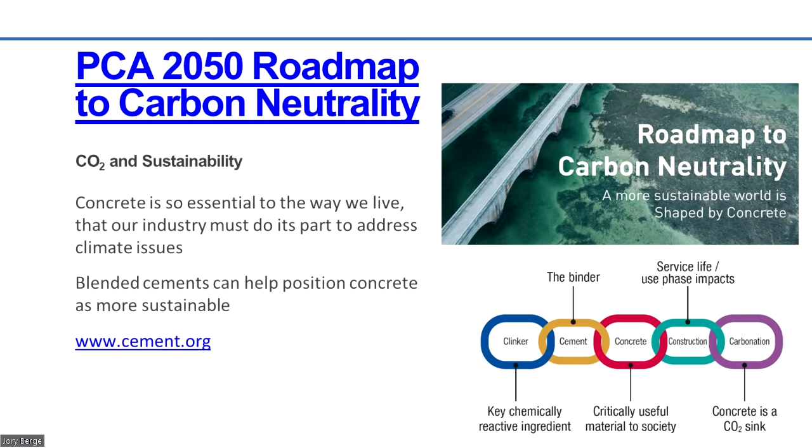The reason we're doing this is not to surprise anyone, but for sustainability. Just last year, PCA and its members put out a roadmap to carbon neutrality. The goal is to be carbon neutral by 2050, and the ways to get there include blended cements. There are many other things that need to be optimized in a concrete mixture and in concrete use and construction, but the choices we make with the blends of cement will improve its sustainability footprint.

So what is a Portland limestone cement? It's exactly what it sounds like. If you know what Portland cement is, its main characteristics are the clinker that is ground to a fine blend and interblended with gypsum or calcium sulfate to control the heat of hydration. That's your everyday good old fashioned Portland cement since the early 1900s, late 1800s.

However, since the 70s and 80s in Europe, people have been blending other products, and many types of products are called supplementary cementing materials that you hear about today. But we've also been intergrinding limestone as an addition to the cement. What's important here is thinking about it as an optimized material at a cement plant. So instead of this being added subjectively at a ready mix plant, this is added by the cement producers and measured and performance tested before it goes out to market.

Currently this is probably going to save you about 10% on your CO2 footprint. The other takeaway with the US standards is that there are C1157 cements that are performance-based, that basically tell you general use, moderate sulfate, low heat, high early, et cetera. These have been in practice and have had limestone cements since the early 2000s and have been used in pavements successfully in states like Colorado and others, and have lots of great case studies in the United States as well as all over the world.

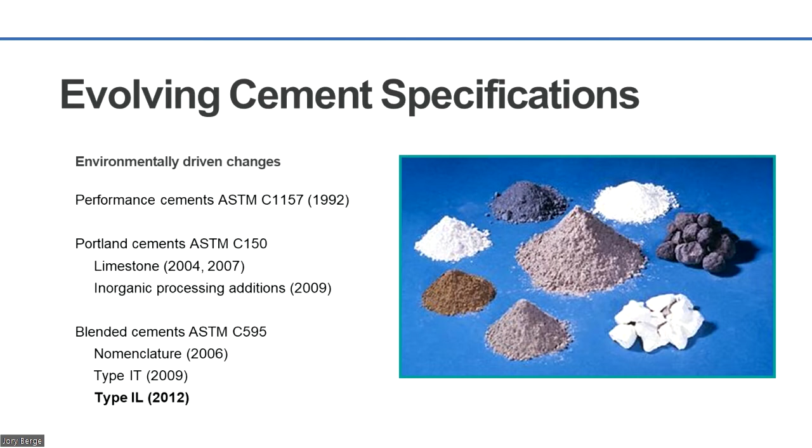Now we've moved with our specifications to the blended cement arena for higher amounts, only because that seemed like a safe home for people who are unaware of the product. So it's not that much different than Portland cement, which has up to 5% limestone interblend in it. It's just a higher amount, and we've allowed since 2011, officially 2012, type IL cement, and then type IT cement, which usually has another SCM in it to meet moderate sulfate or moderate heat, et cetera.

So where are these allowed? Everywhere. 44 states have embraced and accepted PLC cement, so that includes North Dakota, if you can figure out where you are on the map. The ones that are holding out, it's purely due to wanting their own research numbers. We're working on those states, and we should have all 50 states, most likely, if not by the end of this year, within the next couple of years, because this is a product that is here to stay.

It's not meant to be forced on you. It's been out for a long time. And type 1L cements, their properties are the same, if not slightly better than an ordinary Portland cement.

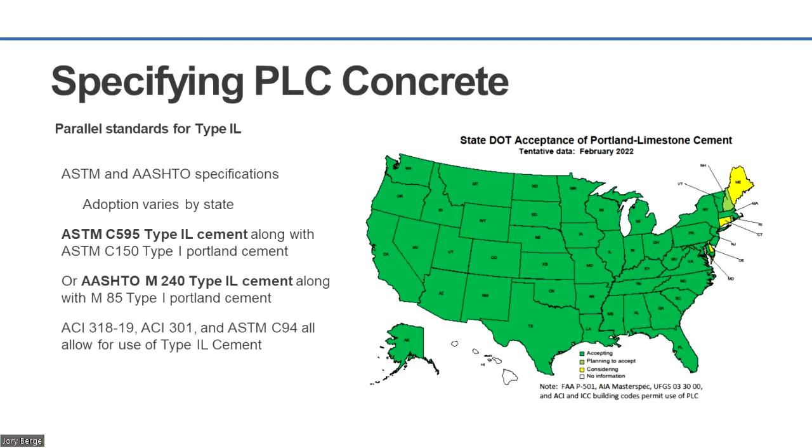That's just due to the processing of it after the clinker is made. They're typically ground slightly finer, so that gives us some early strength generation, and it also may or may not speed up your set time. So the things you're thinking for performance are actually the opposite of what typically happens in practice. If you do need to fine tune your mixtures, it might just take a slightly different water demand or admixture dosage, but it's not night and day from ordinary Portland cement mixtures.

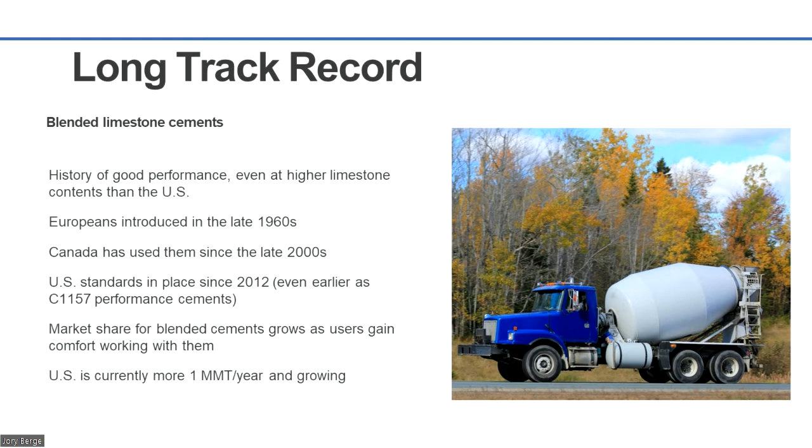This has been proven by many different types of concrete mixtures over the years within the United States as well as in other countries. We have lots of research available at PCA to prove that to you. What this is going to do for us is really contribute to lowering the carbon footprint of concrete, and that's really what our end goal is here.

The replacement level is not like using an SCM. It weighs the same, 3.15 specific gravity. We're looking at very similar mix designs with a 1-to-1 replacement ratio. This typically allows for the same values of fly ash and slag that we commonly use. So that's something to consider.

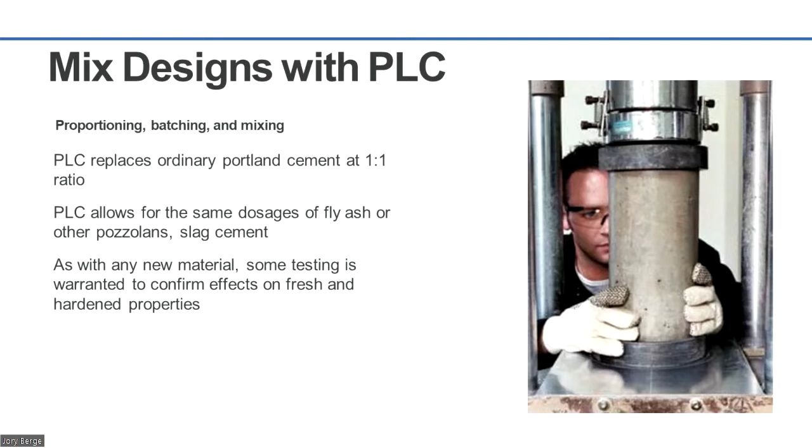If you're asking about the performance of concrete, what you want to look at is how it may affect your fresh concrete properties. This is where contractors care: what's it doing to my slump, what's it do to bleed rate, what's it doing to set time? That's the kind of performance measure that engineers don't normally think about in their specs.

The good news overall is it's comparable to ordinary Portland cement. It may decrease your slump if it's ground much finer than your typical blaine that you've seen in your region. It may decrease your bleed, again based on fineness, and it may speed up your set time, but it rarely delays your set time. Depending on the fineness and optimized blend, this could increase the hydration rate and may actually increase early age strength, and depending on your curing, control your long-term rates.

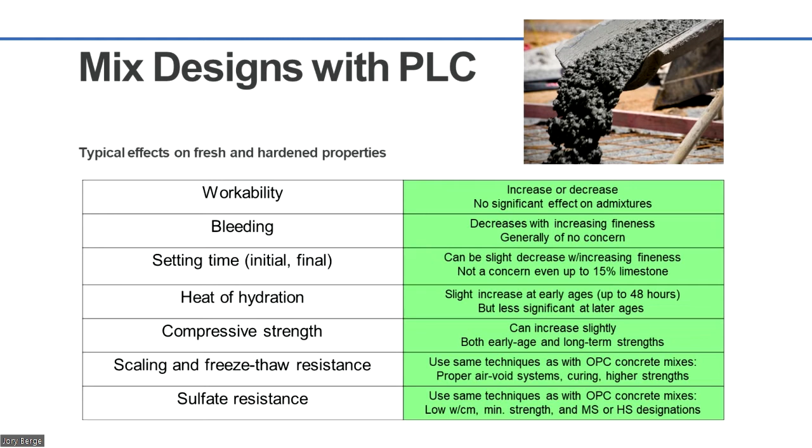We have a lot of proof of that. If you have not gotten familiar with them, just know that you can get them in any flavor you want. So if needed in a 595 blend, they can be high early, moderate heat, or high sulfate. It depends on what your market demand is as to what cements would be available for you.

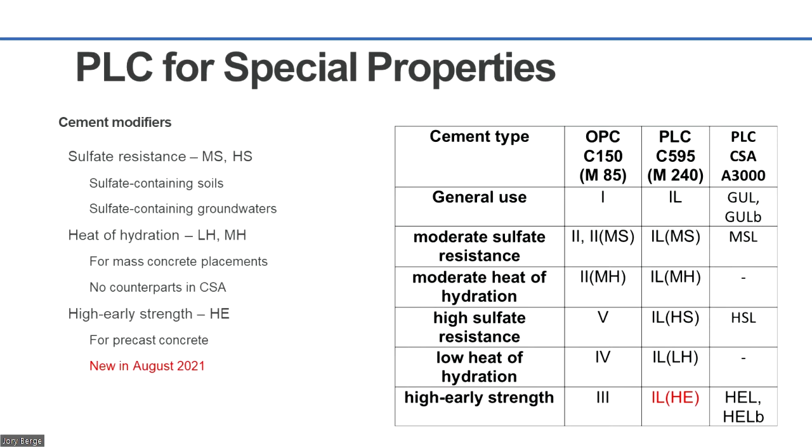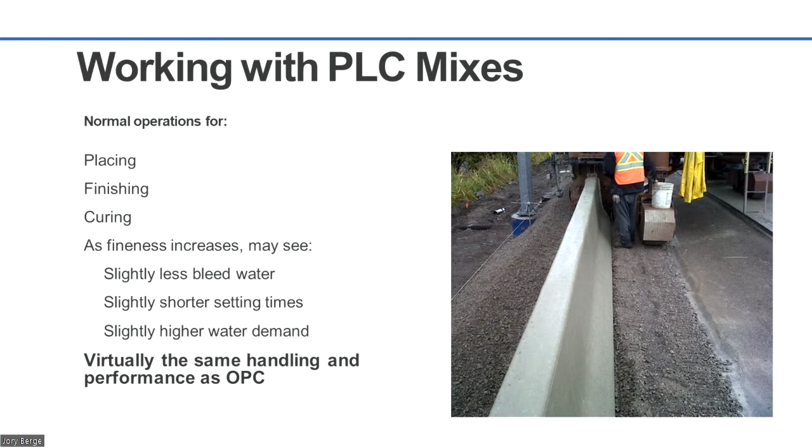When it comes to mixtures, especially for paving, the things to look at are what type of bleed rate and set times you might get. Again, the perception is often that it's going to be a delayed set. What you might get is a quicker set based on a 1-to-1, but it again depends on the blaine.

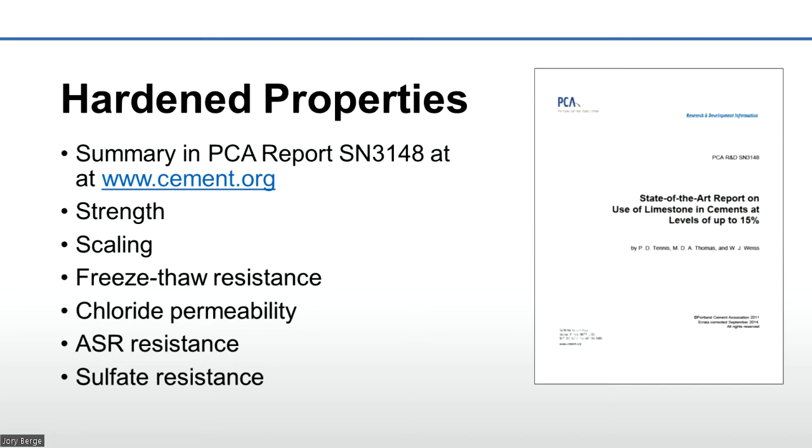One quick part of the intro: I was introduced as Doug Rhodes with Boral Resources. This February, Eco Material Technologies purchased Boral Resources, or Fly Ash North America operations. So you'll see the new logo at the top of the slides, and we'll be known as Eco Material Technologies now.

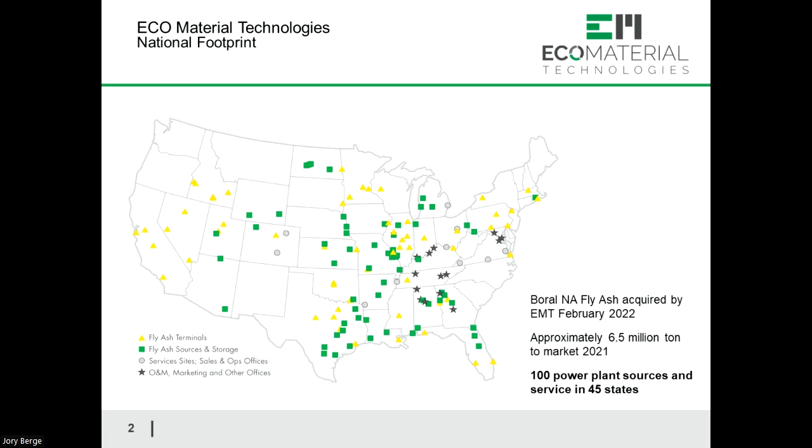Show of hands, anybody doing business with Boral here? Ready mix producers? Yeah, so you'll start to see that change in the near future. Just for reference, we're in about 45 states in America, roughly 6.5 million tons sold last year. That gives you an idea of the footprint, and you can see the distribution locations and ash management locations on the map there.

Today I wanted to give you an overview. We only have 10 minutes, so we can't get too far in the weeds on ash beneficiation and utilization, but I can give you an idea of what Eco Material Technologies is doing regionally here in North Dakota and nationally to either maintain or augment supply of SCMs and fly ash.

So where's all the ash at? Regional disparities - a lot of times you'll find we have a lot of ash someplace and we don't need it there, and a place where there isn't any ash. So a lot of our logistics is by rail. We rail materials from as far as Illinois all the way out to LA, and from Alabama up into the Northeast.

Here in North Dakota especially, you can produce and place concrete in the winter, but it gets a little difficult and business has a lull. So one of the things we're doing is storing materials in flat storage and vertical silos.

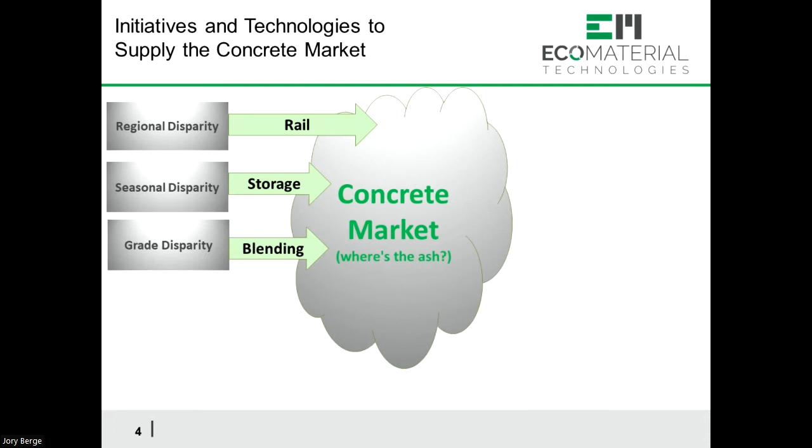The other thing we do is beneficiation. I'll show you a couple different technologies we use for carbon mitigation. But also we blend materials in the Southeast - we blend an F and a C, and it gives properties that are real desirable to the concrete producer, namely set time, ASR durability, sulfate soundness, etc.

And then quality disparity - we'll use a proprietary chemical treatment on the ash to render the carbon inert. I've got a slide that dives into that a little deeper.

The other thing you're going to start to hear a lot of buzz about, if you haven't already, is reclaiming or harvesting landfills and ponds that have storage of ash from yesteryear in them. We're active in the Northeast on that right now.

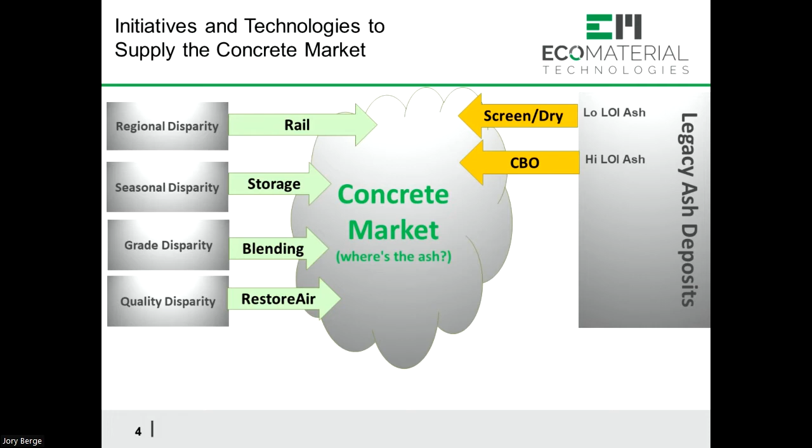If you look at it, it comes into two categories - I'm going back and forth with the glasses. On a lower LOI, where you have a lower carbon content, a lot of times you can just take that material out of the ground, dry it, screen it, and put it in a silo, and it meets 618 requirements. There are some occasions where you'll have a much higher LOI in that impoundment, and it's going to require some sort of beneficiation like a CBO or carbon burnout, which will reduce that carbon content to an ASTM acceptable level.

I'll also give you a brief overview - one of the emerging technologies is ground bottom ash. They're close to getting that approved in ASTM 618, or in a designation on its own. 618 may go to just coal ash, not coal fly ash. It's kind of where it's headed right now.

Then also you got to look at imports - there are materials coming in from outside the US, Japan, Turkey. You'll see some of these if you're in coastal areas mainly. And then natural pozzolans.

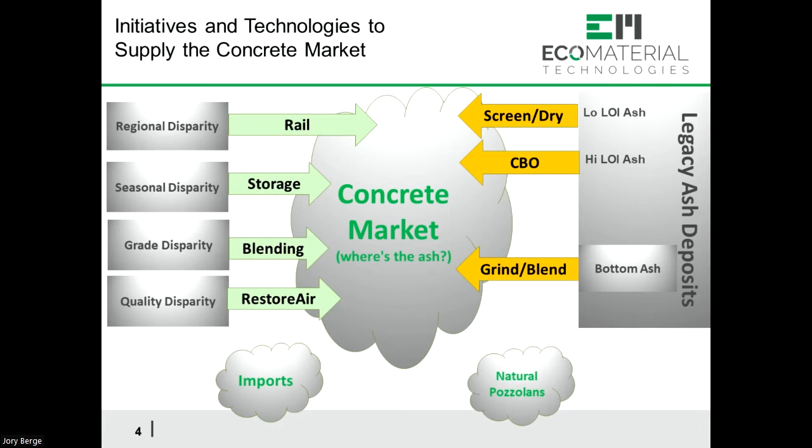I'll use the acronym EMT - I'm trying to get through this without saying Boral. EMT is now operating, it's in its final shakedown, should be operational by the end of this month - the Kirkland Natural Pozzolan mine in Arizona, and I have a slide on it. The only reason I bring up those technologies is because they may make their way to this regional area at some point in time.

So I talked about this regional area and the ability for us to move materials around in lull season or winter, using vertical storage. One of the big things that happened here this year was Coal Creek was slated to be closed. It was purchased by Rainbow Energy and will remain operational for the foreseeable future. So as far as a Class F good pozzolan that's very consistent, we're lucky in this area to have that one. They've just recently renovated the dome there, and we can load out up to 100 trucks a day there, in combination with rail.

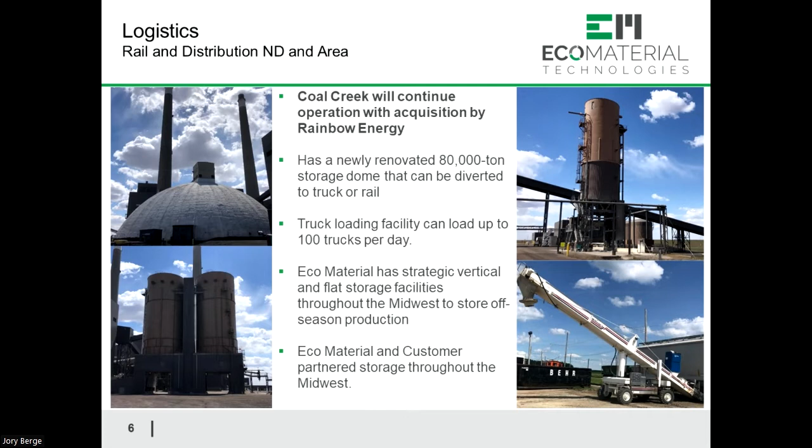Again, we have that strategy for the wintertime or the low months to store material and have that available in the peak season.

I'll address harvesting. This slide and the next are from a project we have in Pennsylvania where we're excavating the material, drying it and sieving it, and it meets the 618 criteria. A lot goes into looking at an impoundment, and there's two types: one is a dry stack, where they've conditioned the ash and compact it in place. The other is a pond, which is not as friendly to excavate or reclaim. There's stratifications of density and layers created by water flow, so the hydrology of that is not as friendly to reclaim or harvest as a dry stack.

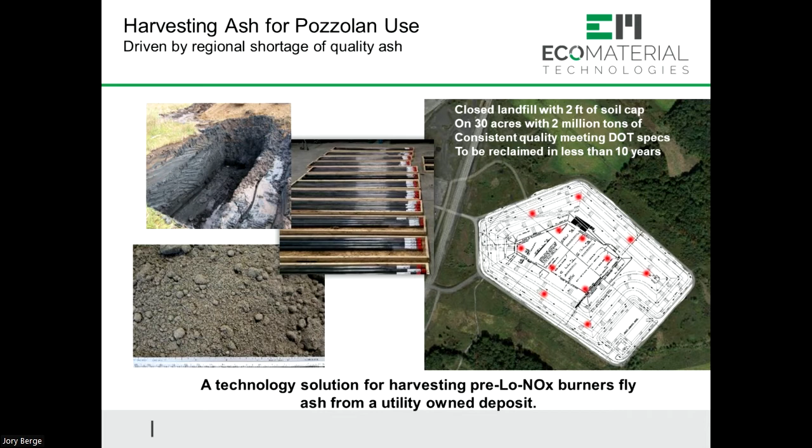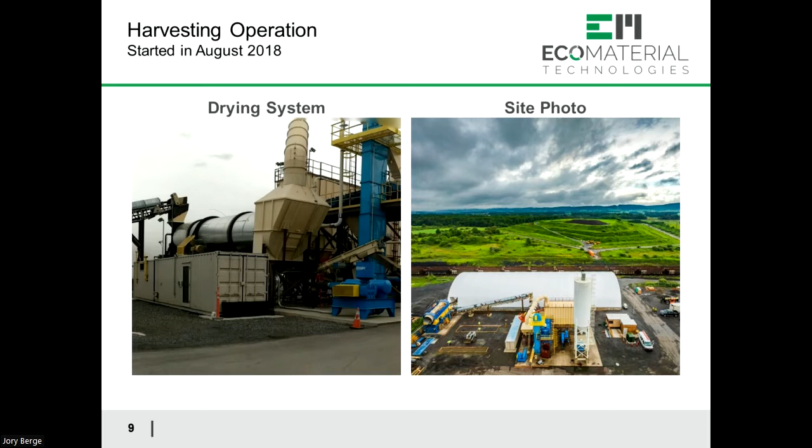One of the things we'll probably see is we're starting operation in Texas. It's broke ground at Oak Grove—fly ash and bottom ash. Fly ash is carried out the flue gas or exhaust, and the bottom ash falls from the bottom of the boiler. They roughly have the same chemistry, so you can take these materials and grind the bottom ash to a fly ash consistency and use it just like you would fly ash. Now there's a couple little things that go on: you're going to have an angular, not a spherical, nature, so the water demand is slightly higher, but the chemistry is identical and the strength activity index is almost identical.

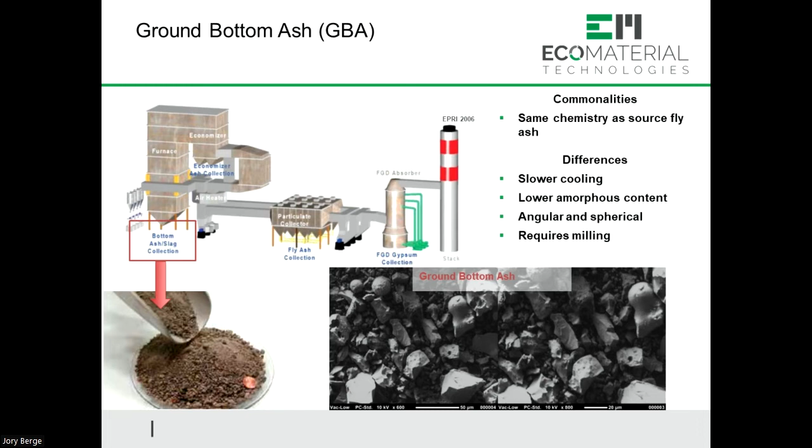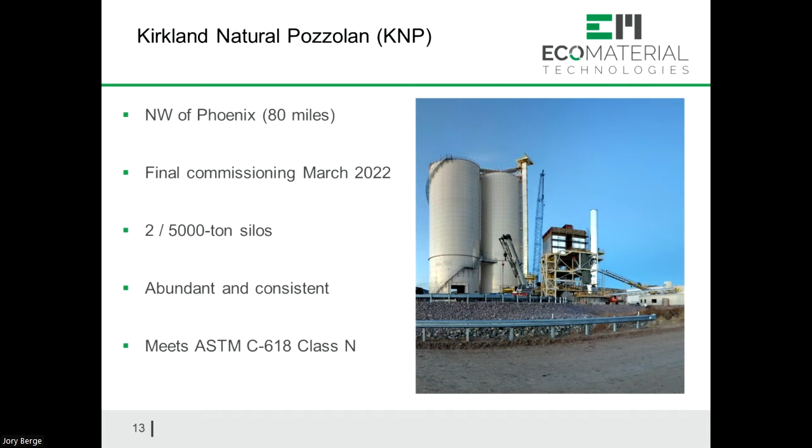Again, we've got this operation northwest of Phoenix. It's going to be operational at the end of this month, with roughly 200 tons an hour capability. There's the deposit—they say roughly 38 to 40 million tons of material readily accessible. So this material will be pushed into the Western market, but logistics, who's to say it couldn't make it this far by rail?

I wanted to drop back to that southeastern blending that we did. We did a great deal of work with the Georgia, Alabama, and Mississippi DOT, and got all this certified years ago for use as a pozzolan in their area. It does meet all the 618 requirements on both sides—both the feedstocks for the F and the C are spec material—and then we produce what's called a performance pozzolan.

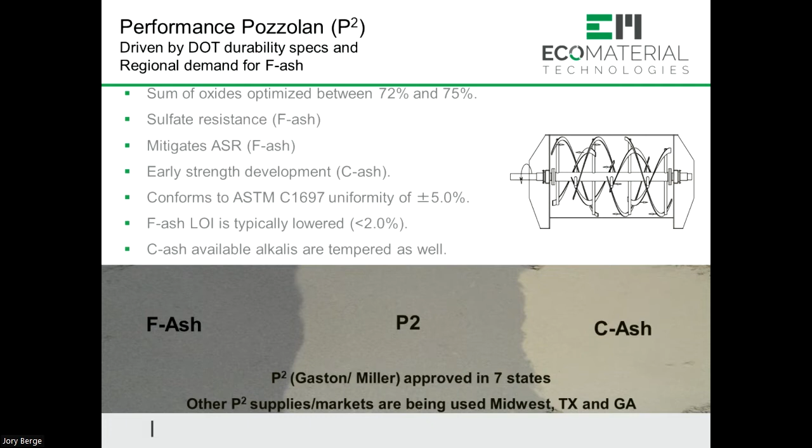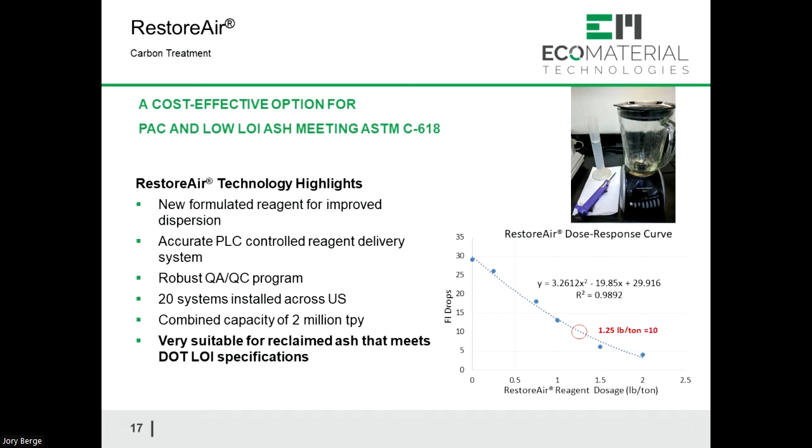We purchased the rights to PMI's technology, which is a carbon burnout technology. They were operating about 4 plants in the northeastern United States in the past. Around 7 million tons were processed through those plants and produced a really desirable material as far as air entraining.

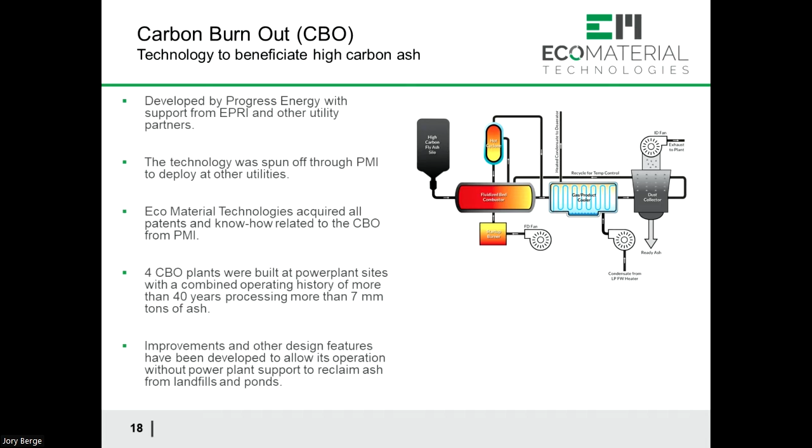So just to summarize ash and ash utilization in your area, for the North Dakota area you're pretty much looking at Coal Creek, augmenting those supplies and making sure you have the storage required to have that material stored in the off-peak seasons. You may start to see some harvesting in this area, and that harvested ash will come in the form of an F—probably just dried, sieved, and put into the marketplace. On the other side, you may begin to see SCMs or other materials, and you'll start to see some emerging technologies like ground glass and similar things starting to make headway into the marketplace. So with that, I'll close and hand it over to Joe.

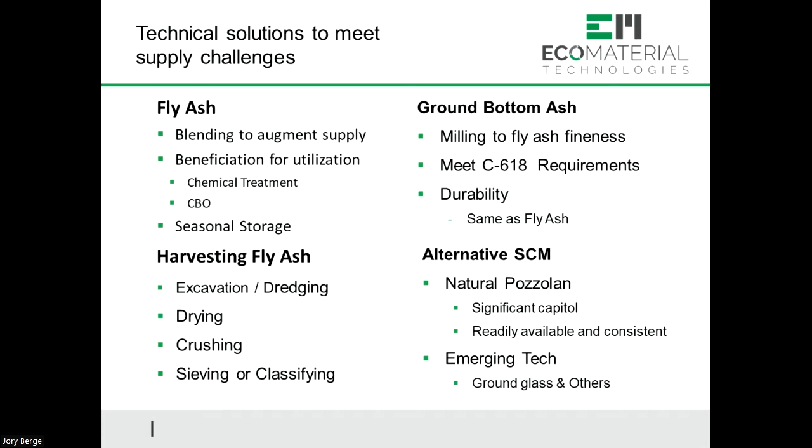Can you guys hear me okay if I leave it down there? I have this problem all the time. You can see me okay, right? Why are you laughing? No, it is an absolute pleasure to be here.

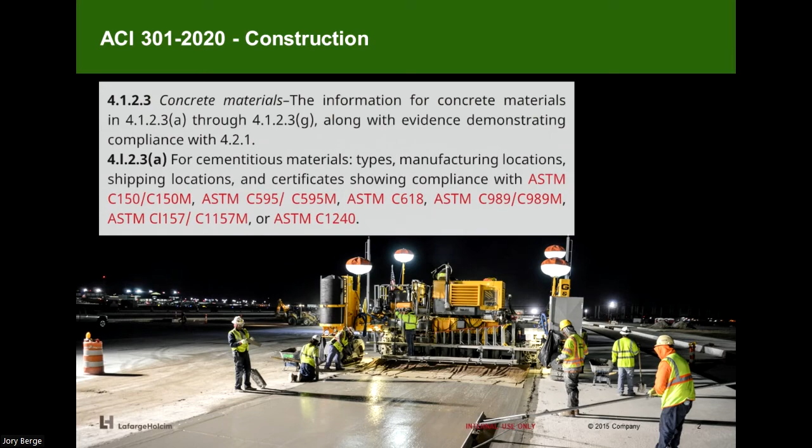So it's going to happen organically. These quote unquote new products are coming out, which again would be allowed for use if you simply updated your specification. Follow me so far? I don't want to go too fast on you.

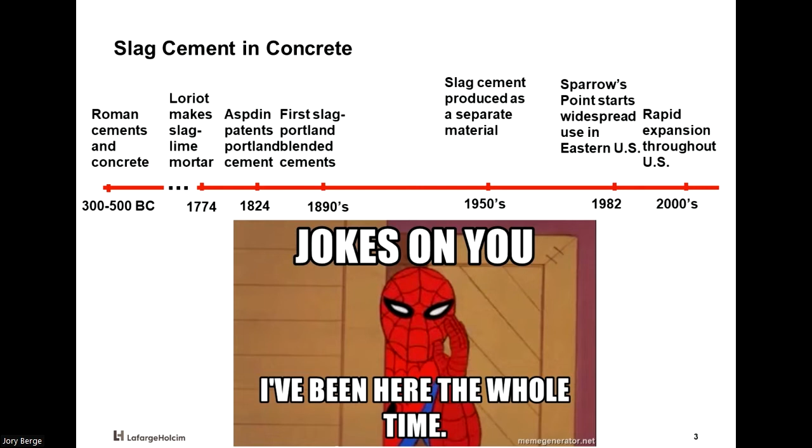So slag cement, I said it's not a new product. In fact, it predates use before Portland cement. It is older than Portland cement. There is a huge track history, lots of information that's out there. I'm going to give you a couple of websites, okay? But it's new to you.

And it's new to you because slag cement comes from iron ore processing. So where the iron ore is, where it's being processed, guess what? That's where slag cement has historically been. But with availability of product and shipments and demand, it is now available and has been for a couple of years now in North Dakota on, I would say, Missouri River and east, okay?

So if you want slag cement, very simply, my ask at the end, foreshadowing, spoiler alert, is simply allowance and communication. If you forecast, you will have some available, okay?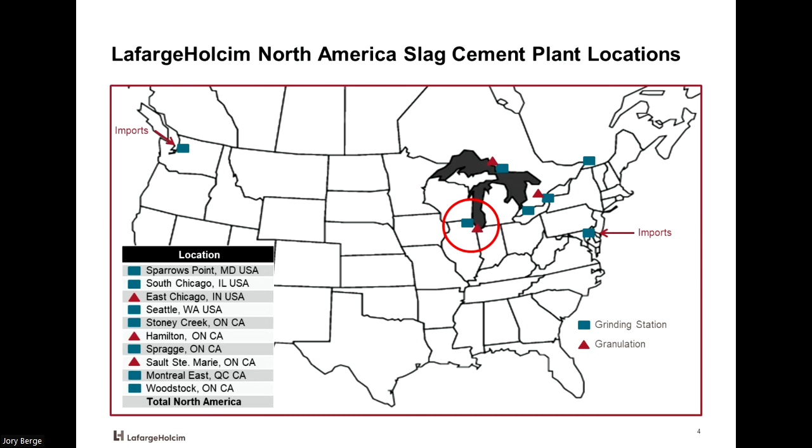That being said, everything I want you to know about slag cement, number one, it meets an ASTM. That ASTM is C989. Everybody say it with me. 989. Get that in your track record.

That's going to be my ask for today. The second thing I want you to know, it's already North Dakota DOT approved. We've already done the legwork. It's available for you. Slag cement, very simply put, is another type of supplementary cementitious material. It undergoes the pozzolanic reaction. If you're looking for enhanced durability aspects, enhanced strength, enhanced ASR and sulfate resistance, there are methods, there are ways of using slag cement to get that type of performance. Again, I'm not going to jump into too many details today, but just understand we have lots and lots of information for you to use the product.

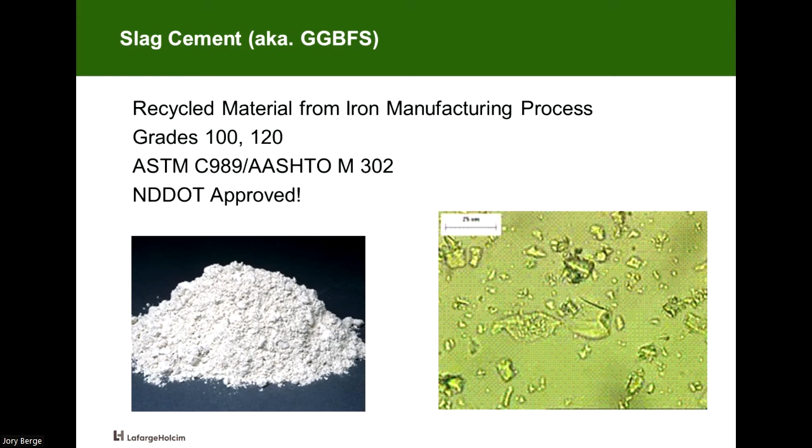That being said, my ask is simply this. I don't hard spec products. My ask is to include an OR statement in your specifications. What's the word? What's the number that I want you to remember?

989. I can't hear a word you're saying. It's all in my head, right? Most of the time. That's great. You could be laughing, crying.

I don't even know, but these are the two websites I want you to use. There's a plethora of information. The first, Shameless Marketing, that's my website. I put Holcim on there because I'm supposed to, that's what the logo police told me. The second is the Slag Cement Association, very similar to the Portland Cement Association. Lots of good information, case studies, information on durability aspects, acceptance, all that kind of good stuff.

So, I mentioned before, all of these new products we were talking about today, the vast majority of them are already allowed in the industry-wide specifications. You simply need to update yours to the current version of 301, 318. New products will be coming. The interest in sustainability and enhanced durability of concrete is only going to grow, and all of these products fit in. I forgot to mention the third thing about slag cement.

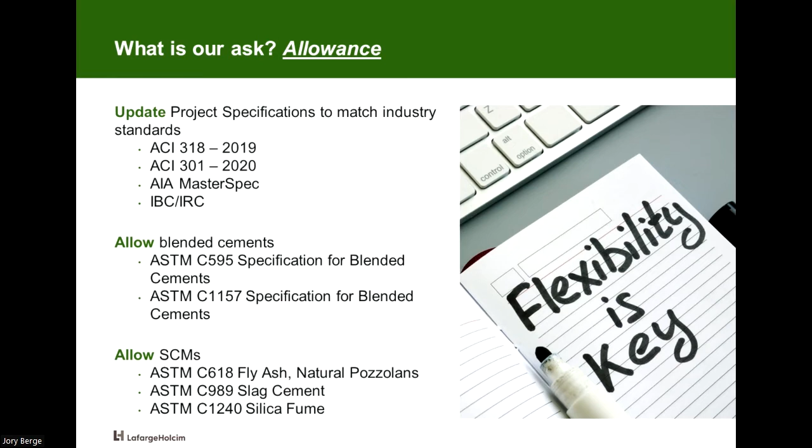It's a recycled product. So if you're worried about the CO2 intensity of your products, it fits right in. Incidentally, if you don't care about that — I'm from the Midwest myself, it's easy to laugh about those things — but I want you to go back after we're done tonight and look up the latest executive order on the $1.2 trillion infrastructure bill, and look up the word 'buy clean' to see what's potentially coming out. If you're not interested in global warming potential or CO2 intensity, you will be very shortly.

That being said, if you want to send me hate mail, here's my information. I really appreciate it, guys. I want to get to the questions, I want to hear what you have to say. Always a pleasure being in North Dakota. I'm going to turn it over to TJ from North Dakota DOT, he's going to talk about specification allowances. Thank you very much.

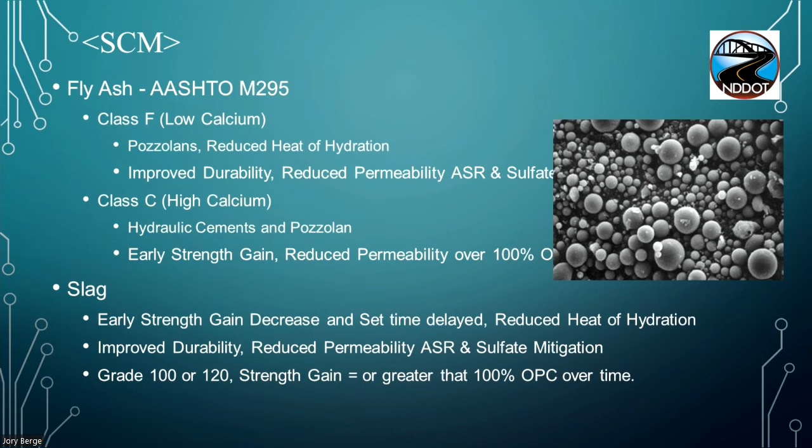Afternoon, everybody. I'm going to give a brief update on why we as owners want SCMs in our concrete. We're all looking for long-lasting, durable, and economical pavements, and I think SCMs play a part in that. There are some summaries here about SCMs to allow more time for questions. I won't dive into a lot of these since they've been covered throughout the day, but if you're a producer, I'd encourage you, through your mix design process, to find out how all these tools work with your mixes. Why do we want to use SCMs?

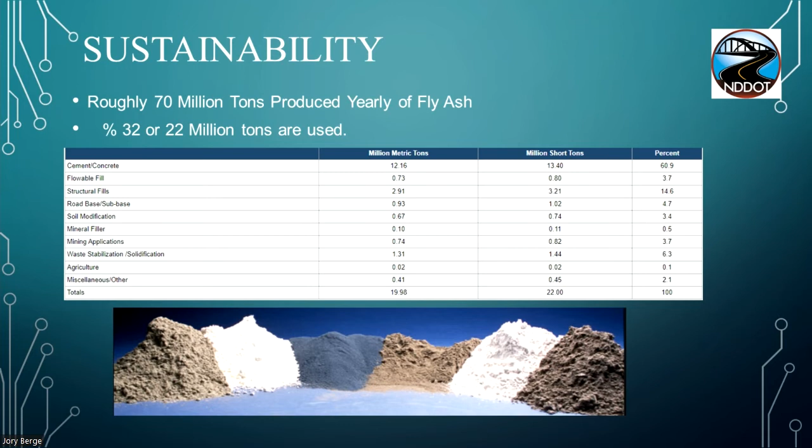Sustainability is another reason. Roughly 70 million tons of fly ash are produced every year. Of those, about 22 million tons are used, and 60% of that is used in concrete and cements, with the rest going toward other construction activities like flowable fill, structural fills, or FDRs.

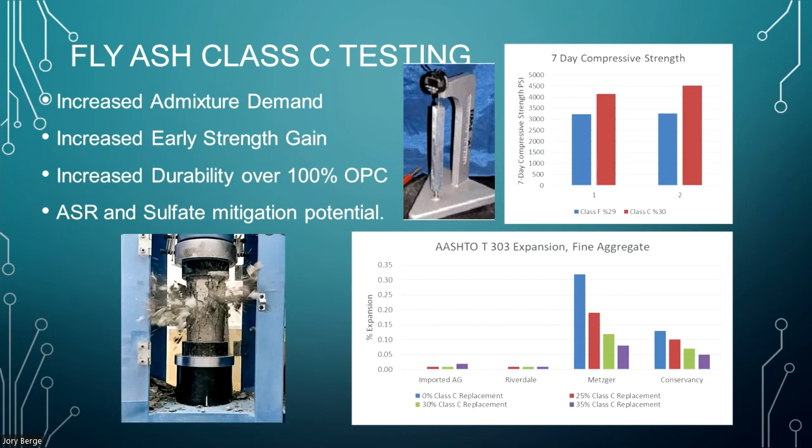Some local testing we've done, and spec updates I'll go over next, involve Class C fly ash, which in the past hasn't been allowed in our industry or state, and now it will be moving forward. Compared to Class F fly ash, we've seen increased 7-day strengths, and we've also seen an increase in admixture demand, so if you're a producer, factor that into your mix design. We've also seen increased durability compared to a 100% or non-SCM mix, which may lead to some ASR or sulfate mitigation. Overall, it makes the concrete a little less permeable than a standard OPC mix.

For the updates in the spec, I won't drill down into all of these, just walk through some slides quickly. Concrete used in bridge beams and box culverts will remain the same as it always has been — you can use Class F fly ash at a 29% replacement by weight. ASE concrete will also remain the same, with the exception of allowing Class C and slag cements. Other concrete has gone up from 29% to 35% and will allow Class C, Class F, and slag cements.

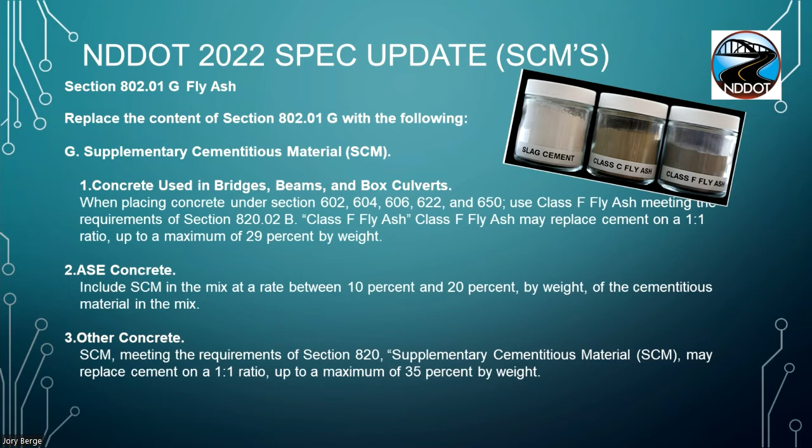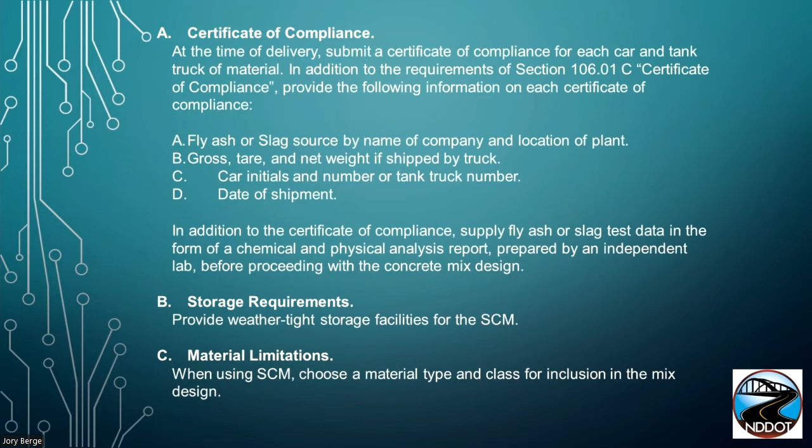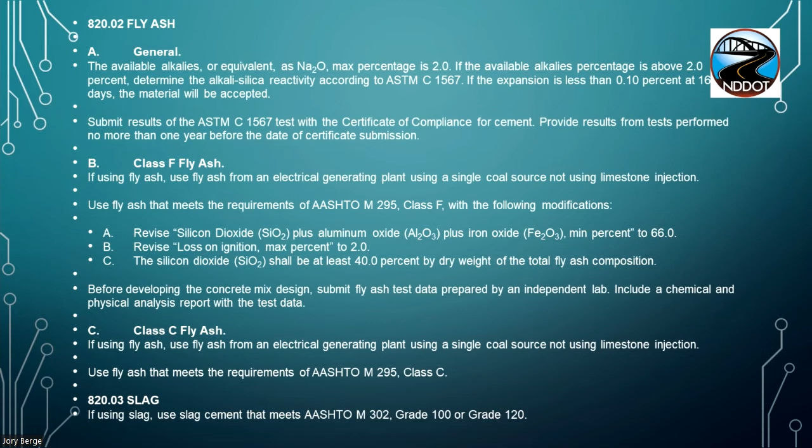Some requirements for these products are outlined in the spec, and there'll be a link for the spec later — I'd ask you to go out and read them yourselves in your free time. Again, some more chemistry requirements, I won't read through all of these. Basically, any fly ashes will be governed by AASHTO M295, and slags will be governed by AASHTO M302, required to be grade 100 or 120.

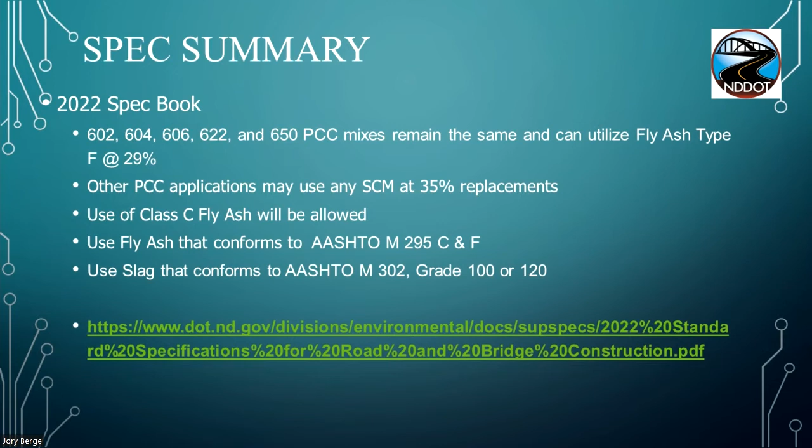Already walked through a lot of this — bridges will stay the same, Class F fly ash at 29% replacement. Other PCC applications have gone up to 35% replacement, and Class C fly ash will be allowed. The governing AASHTO provisions are listed there, along with a link for the specification that I'd encourage you all to go out and look at. And that's all I have. Thank you for your time.